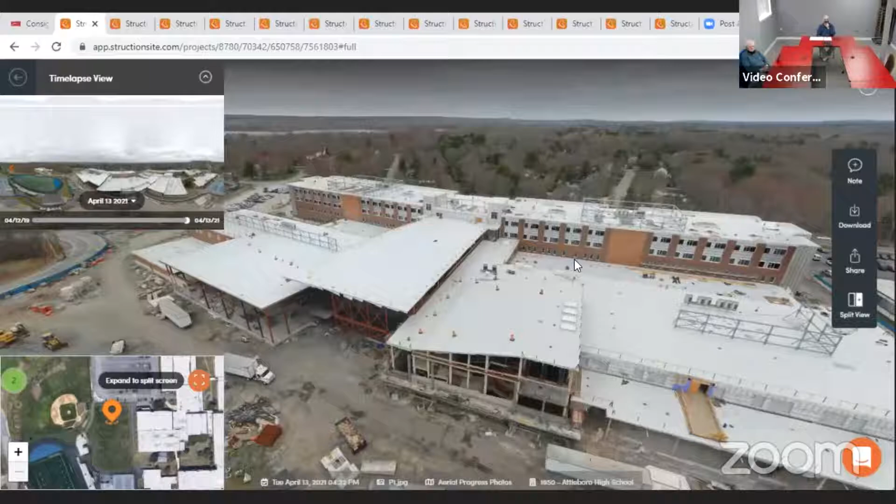Very good, we'll share my screen. Okay, so if everyone can see that. Yes, we can. Okay, so this is obviously the view from the back.

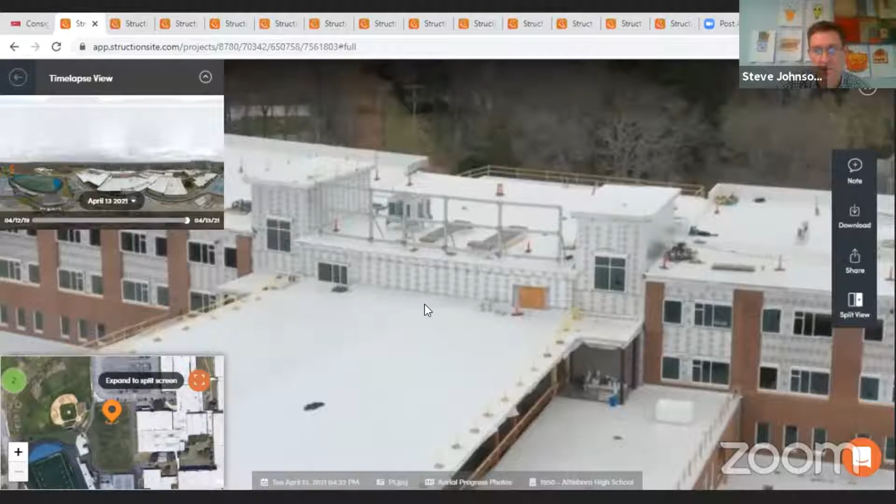Items of note here: I think we talked last month about all these windows, permanent windows are in, but now we have glass in. I'll zoom in a little bit more. Glass is in, and this staging is set up and getting ready for metal panel that's going to go in all these gray areas that you see here. And then if we flip over to building A, same thing: we've got permanent windows, permanent glass, the masonry's done, and then metal panel will be next, as is this area here. This gets metal panel as well.

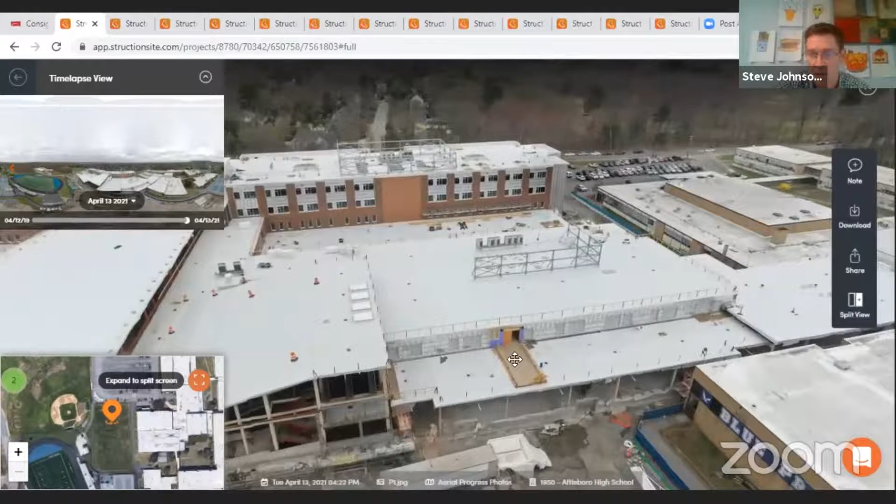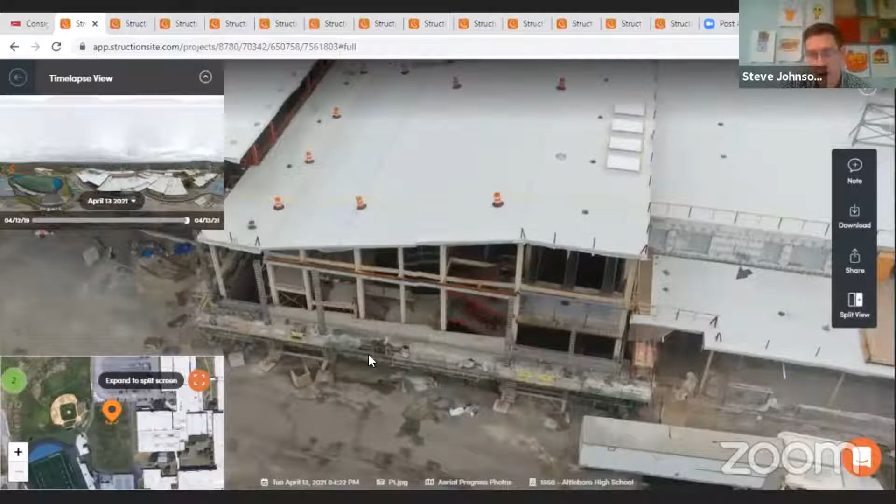So our metal panel sub will basically start and work their way across. Other items of note back here is just continued exterior framing in different areas to help close the building in. And if we look down here, the mason has started installing block back along the south side of the building here.

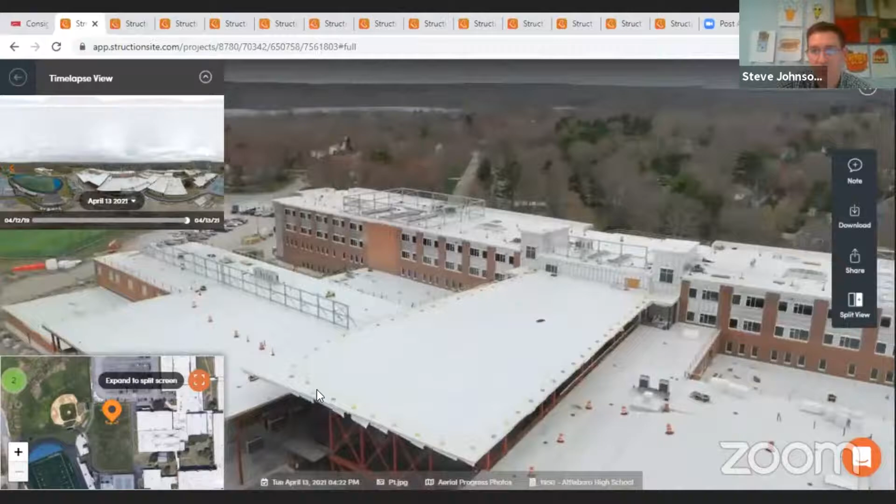They completed the masonry and the block over at the west end of the building. And there are some units that have started to be placed on the building. These are small condensing units right now, and these are some curbs for the larger units. They're actually starting to install those today. I don't have any pictures, but they're actually still doing it tonight when I left. So next month, we'll actually see some large rooftop units up on the ABC roof here, which is so exciting.

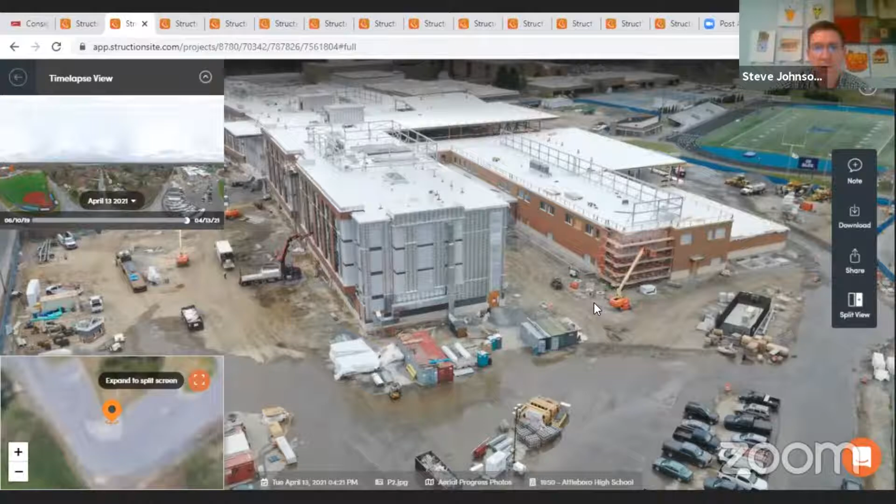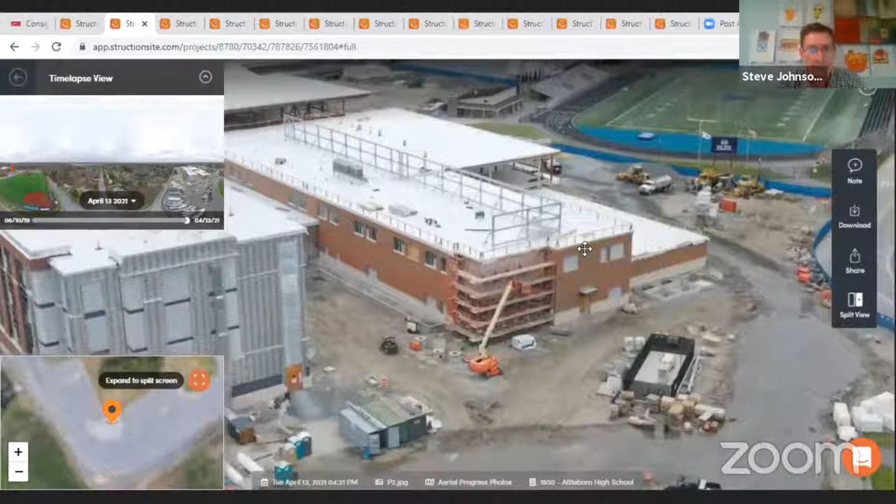Steve, we have a crane back on site now, correct? We do, yep. View from the west, again, just showing some more progress with the masonry around this is the future loading dock that we're looking at here. More complete masonry over down on this end. That's probably the exciting stuff for this shot.

And then on the east end, similar masonry all complete, closing the building in even more, on the east side, closest to the existing school.

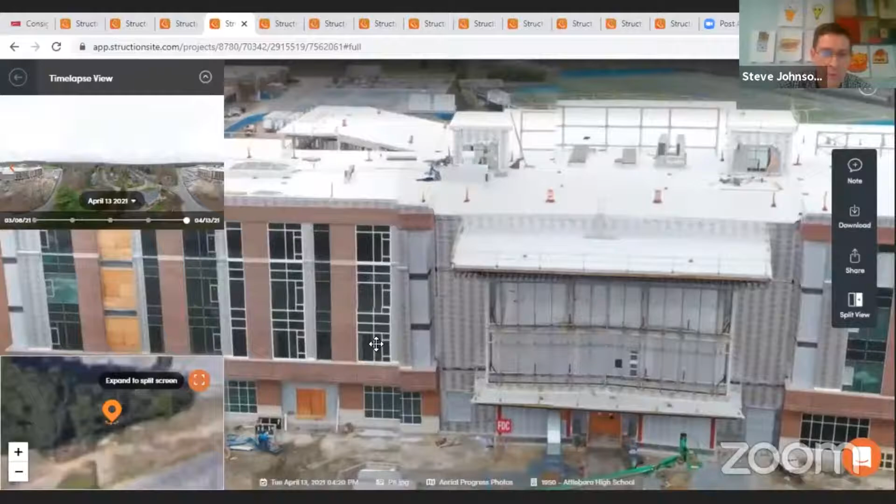And then everyone's favorite view from the front. A lot of good progress here. You'll see this is permanent glass that's going in these units. And then if we zoom in a little closer, when we see the white, that's the snap trim and the covers that go on the curtain wall. And then down here on the first floor, same thing, that's permanent trim there. So that's almost like a complete unit.

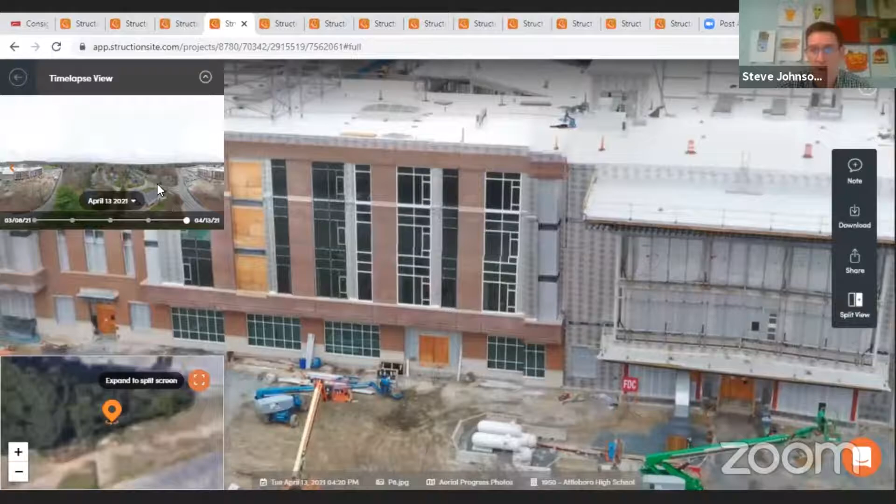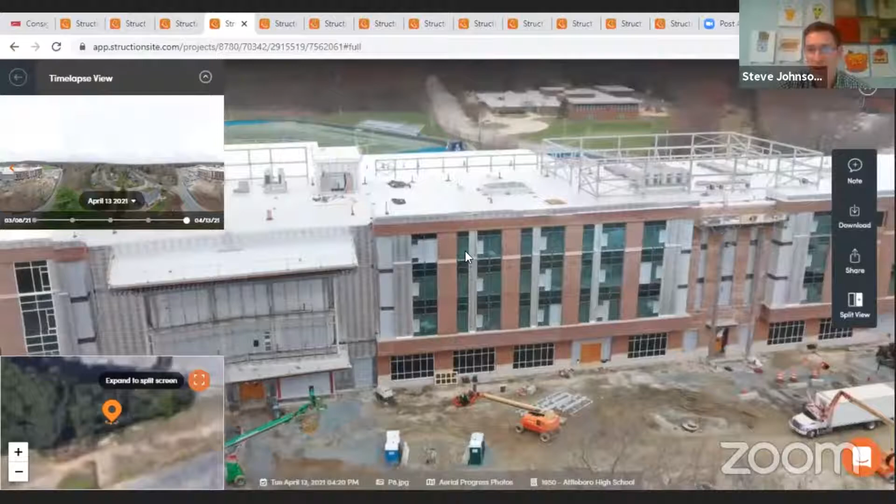And these gray strips, again, will be metal panel, they'll eventually work their way around here. And then the plywood is where we load the building in, so that'll be done last. But a lot of good progress, a lot of the masonry you'll see is done. They're installing some metal trim that goes on top of the roof all around the perimeter of A, B, and C. But the masonry is just about done. You'll see they still need to wash down some of it and clean it, but the bulk of it is just about complete.

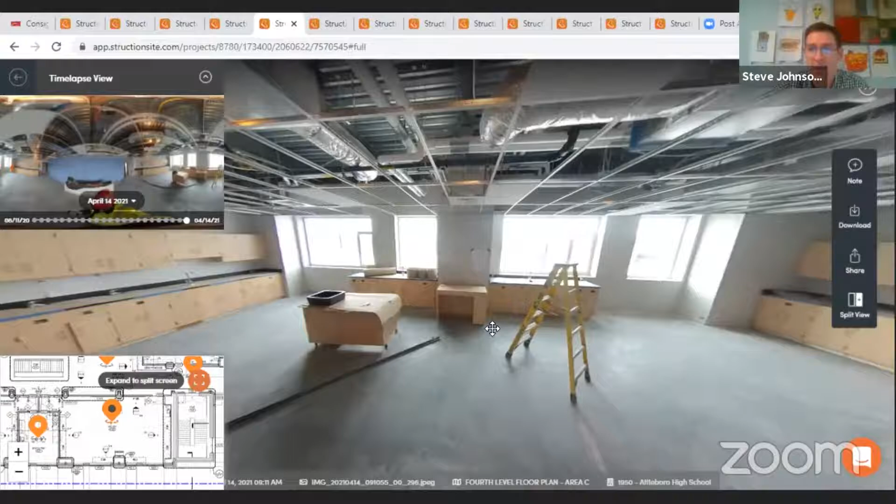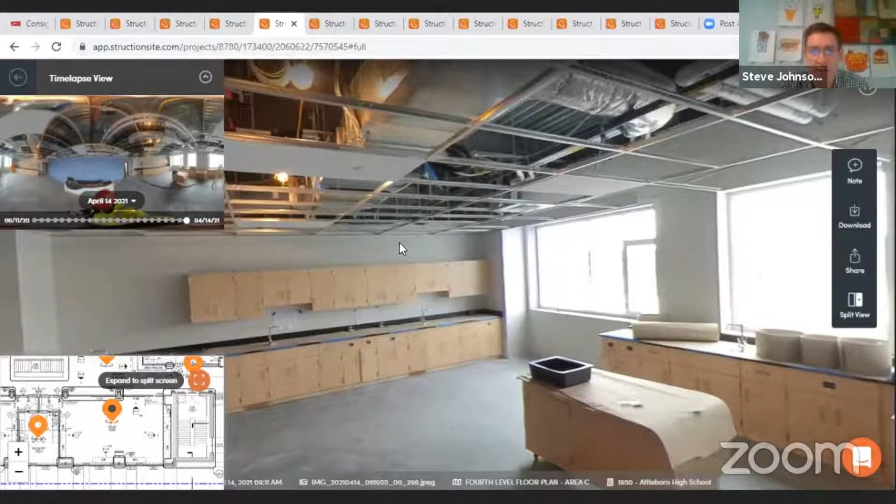This elevation's really starting to come along. As far as interior work, this is the 4th floor mock-up lab, which is furthest along. You'll see this is permanent lab casework with the countertops. Ceiling grid is in, sprinkler heads, grills in the ceiling, starting to look more and more finished. The lights are on site and will start to go in, so we'll be able to show those next month. Good progress on the 4th floor: casework, paint, ceiling grid, all moving along nicely.

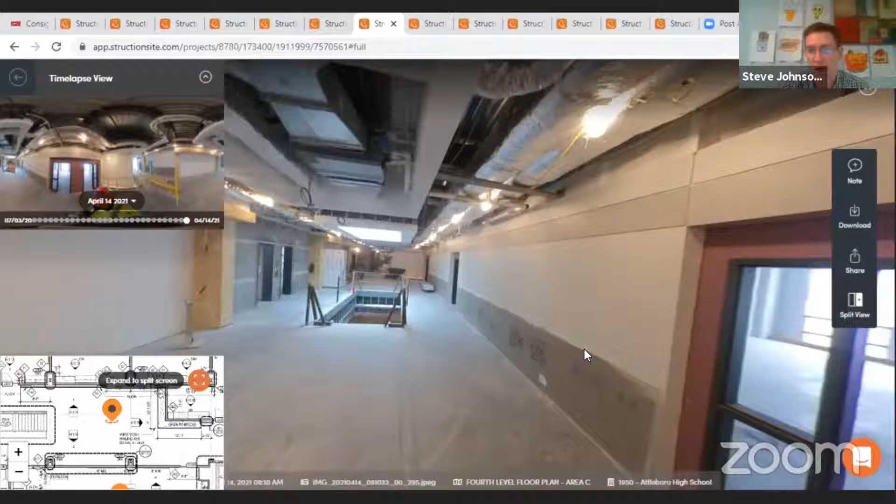This is a classroom just across the way. Classrooms aren't as exciting, but good progress is being made. On the 4th floor, in each classroom there's the one accent wall here, and like I said, there's a lot of grid going in. If we bump down, this is just a shot of the corridor. We're going to start tile in the corridors in the next couple of weeks, which is exciting stuff for us.

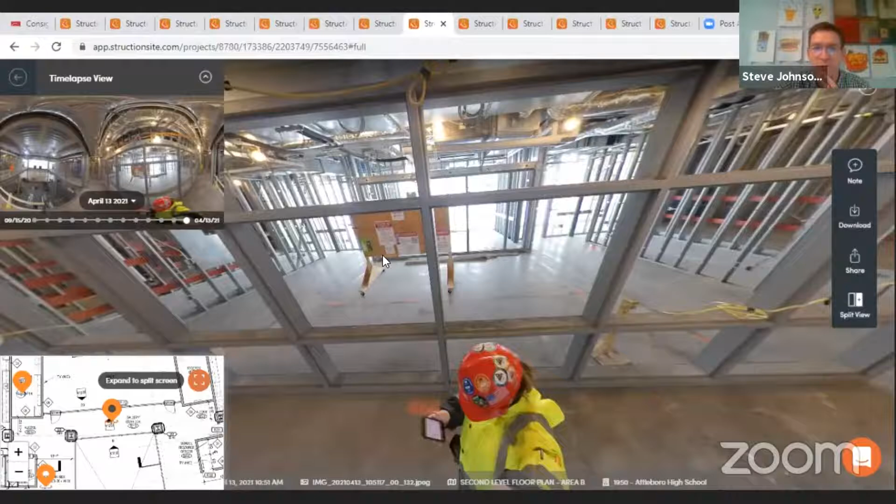We drop down to the 2nd floor area B. If we spin around, it might give everyone some better orientation. That's the front of the building, so a lot of framing. We've actually started a lot of the drywall on the 2nd floor as well. Down on the 1st floor, we've just about completed framing and a lot of the MEP rough in the ABC building.

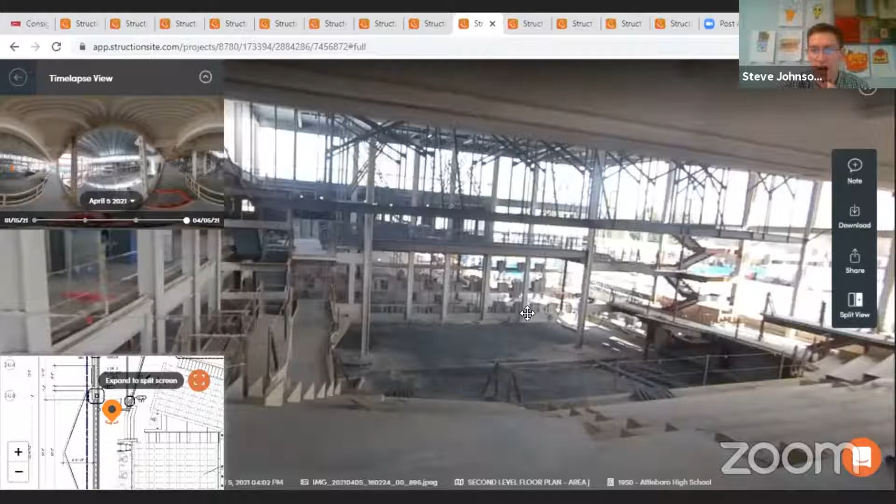This is a shot almost standing from the balcony of the auditorium. You can see the catwalks are installed, and there's a lot more block work ready to go here. This is staging with block for all the masonry walls that surround the auditorium.

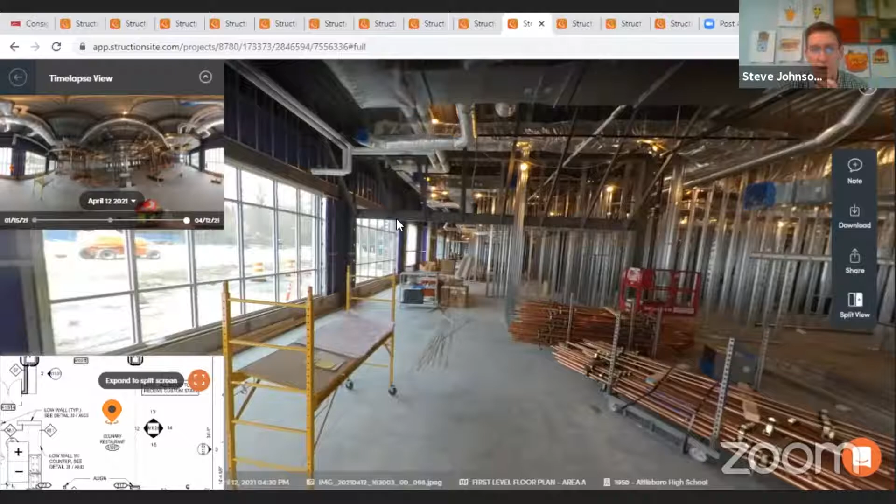What else is exciting? This is a view of the first floor, the future marketplace area. You can see the permanent windows in here. A lot of the framing is done down here, and the mechanical rough continues in this area too.

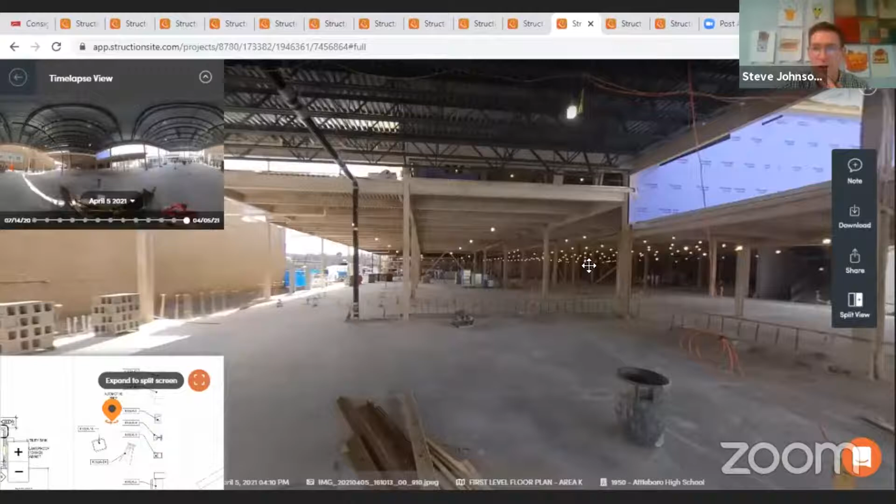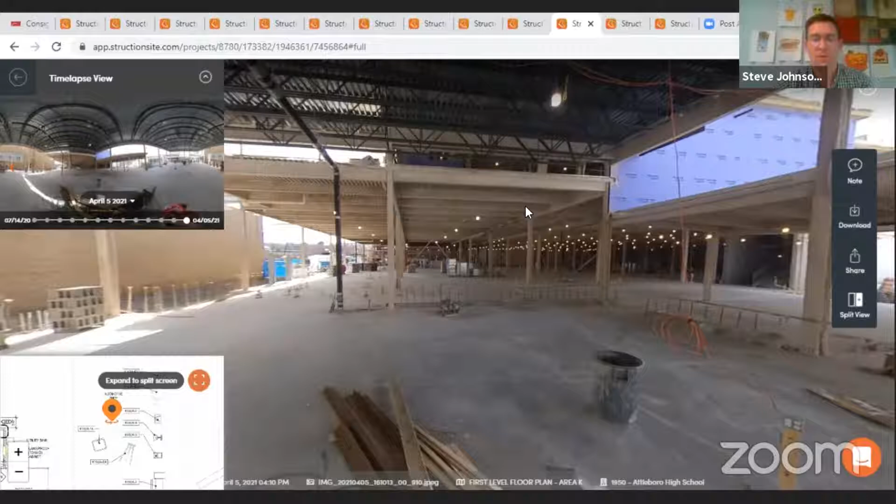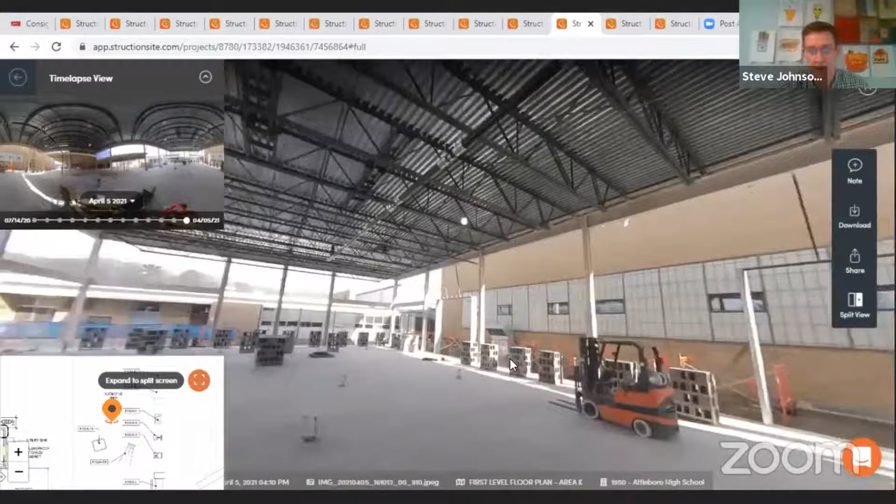This is just a shot from the future automotive area. Why this is exciting is because it's spray fireproofing, and we're almost done with the spray fireproofer, which makes everyone happy because they just make a gigantic mess. So we've got a couple of weeks with the spray fireproofer, and then you see they're loading up all kinds of block in this area too for all the exterior walls in the automotive section.

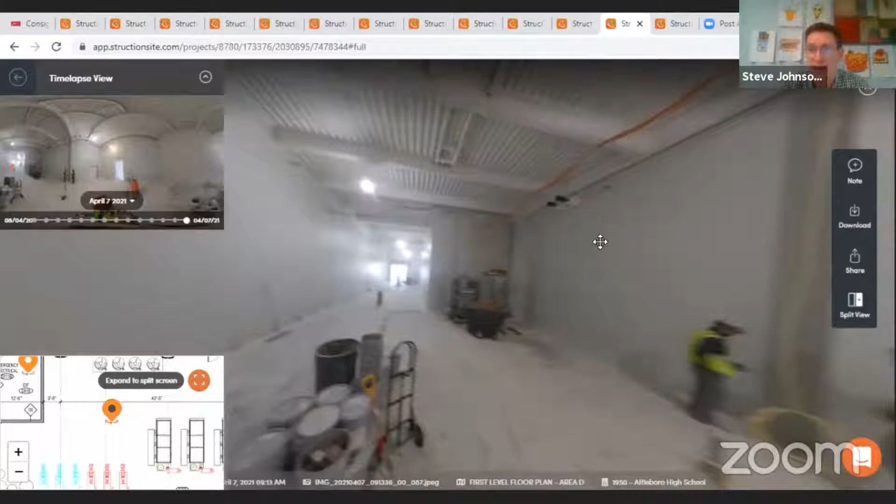Then a shot that makes very few people who aren't in construction excited, but this is a mechanical room. Why is this exciting for us? Because the spray fireproofer is done, and we can start setting the major equipment in here, which is going to start next week. There are months of work that go into this room based on all the equipment, piping, and everything, so it's exciting for us to start this work in the next couple of weeks. A lot of the equipment is already at our subcontractors' yards; it's just a matter of delivering it once we pour some concrete pads.

And then, I'm not going to end on that. I'll end on this again.

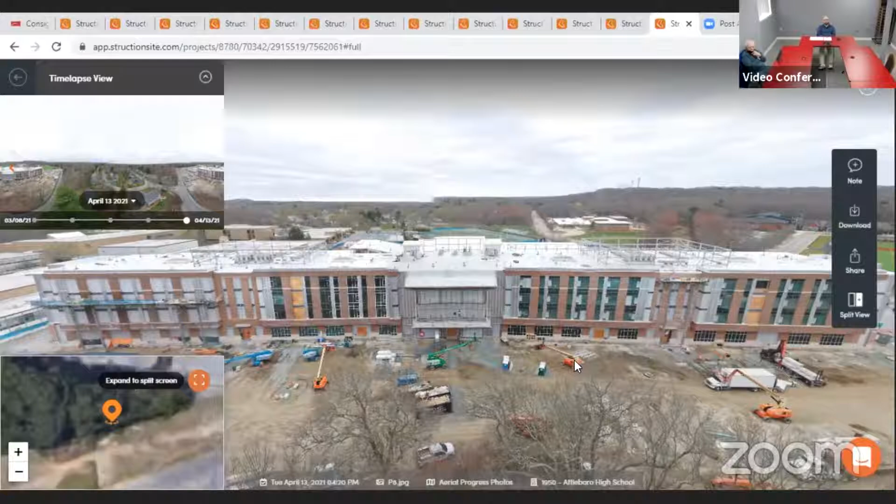All right, does anybody have any questions on the construction update? You're all just sitting there in awe. Okay, hearing nothing, then Steve, where do you want to go next? We'll go right to change order 7. We'll follow the agenda, that works for us. Okay.

So change order 7 has quite a few CRs with it. We'll go through them, and then I'll ask for one vote at the end, Jack, if that's okay. Fine with me. So real quick, GCR 029 was for interior finish revisions. This was the change to the carpet in the collaboration and teacher planning area.

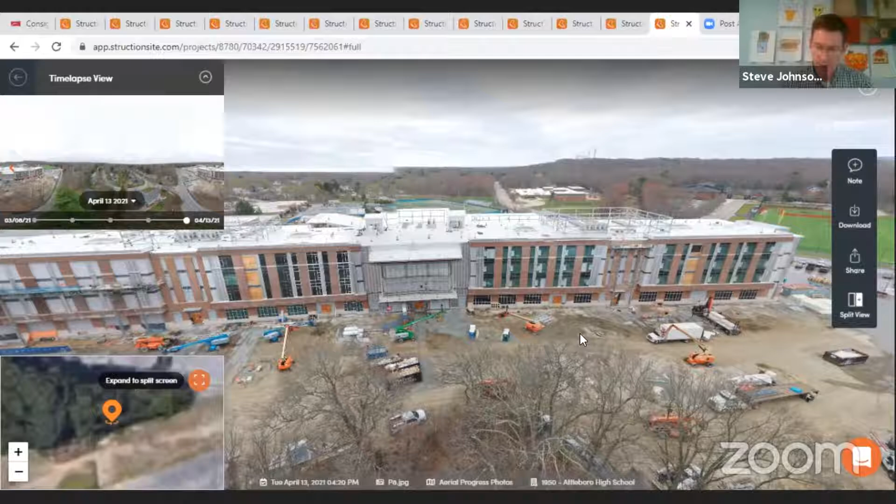That is $25,796.39. Next, GCR 035 added power requirements for heat trace.

This is just a final coordinated plan for plumbing and exactly which lines need the heat trace. That is $11,275.92. GCR 040 corridor switch coordination with the tile.

This is to make sure we didn't have any light switches halfway in the tile, half out. That is a whopping $642.44. GCR 041 service platform.

This is to help Jason and the facilities group access the really high ceilings and some critical valves on the first floor. There's also an access hatch in the slab of the second floor. That is $36,344.34.

GCR 045 is for additional steel supports at operable partitions. Some of the partitions, where they stack on themselves at the end, needed additional steel to support them based on the weight. That is $12,789.75.

GCR 046 gym entry clarifications. Steve, I think you missed a number there. Did I? Yeah, I think it was $6,000. $6,009.31 for the steel supports. You're right, Jack. The next one is gym entry clarifications.